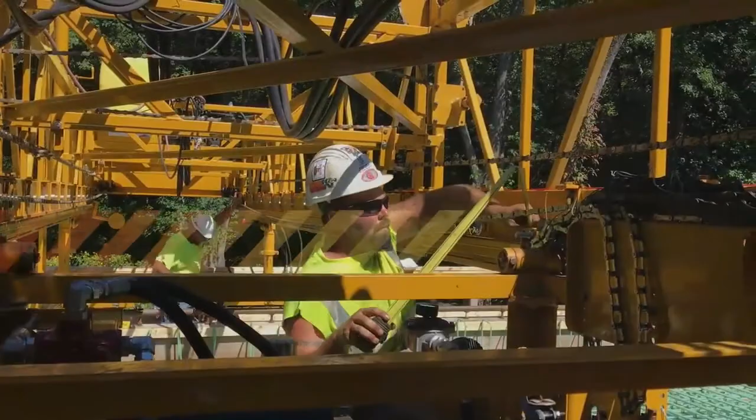The operations presented in this video are meant to be instructional to ensure quality construction. This video is not intended to provide a comprehensive overview of safety procedures. All parties should ensure that they are familiar with and follow all safety requirements, policies, and procedures that apply to

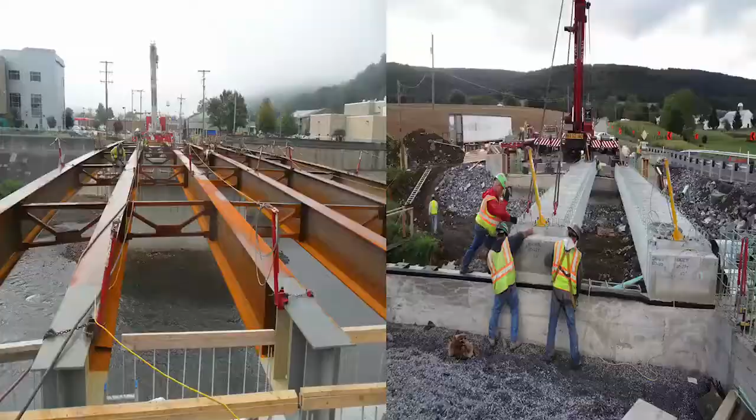their specific operation. This video discusses the important steps necessary prior to placing a concrete bridge deck. While there are many factors in the final deck construction, for the purposes of this video, we will begin after the beams have been set into place and fall protection has been installed.

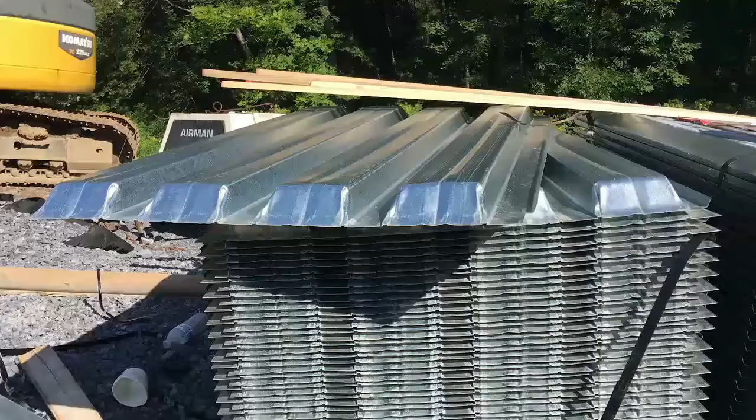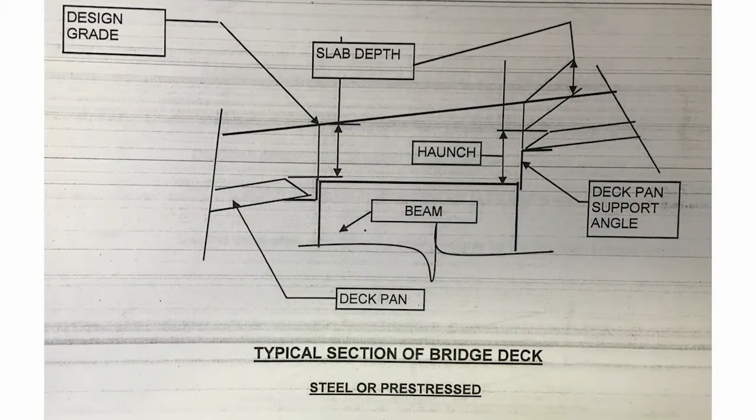Once beams have been set, the first step is to install formwork for placing the deck concrete. Deck pans are stay-in-place forms which support the concrete in the space between beams. Setting the deck pans is critical, since the pan determines the actual bottom elevation and overall thickness of the bridge deck. If improperly installed, too much or too little concrete will be deposited on the deck, which could affect load rating of the beams and overall bridge design.

Approved shop drawings for deck pans must be on the project before they are installed. Upon delivery, verify that the deck pans match the shop drawings in type, thickness, and the manufacturer. Certifications should also be reviewed for completeness and accuracy.

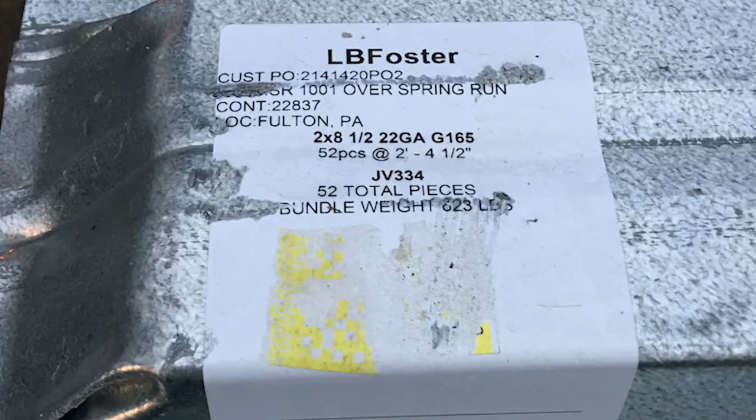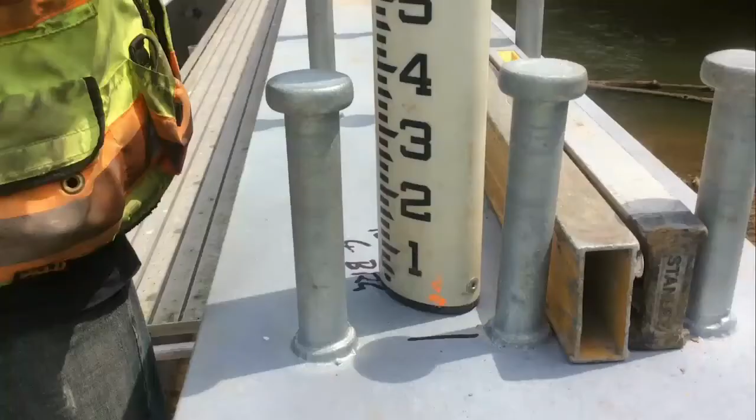Once the beams have been set, the contractor's surveyors will obtain elevations at 10-foot intervals on each beam. These elevations will be entered into a computer program which accounts for finished grade elevation, unloaded beam camber, and loaded beam camber. The output of the program gives the contractor measurements to follow when setting the support angles for the deck pans. A copy of the contractor's computer output should be obtained and reviewed by the inspection staff prior to installing the deck pan support angles.

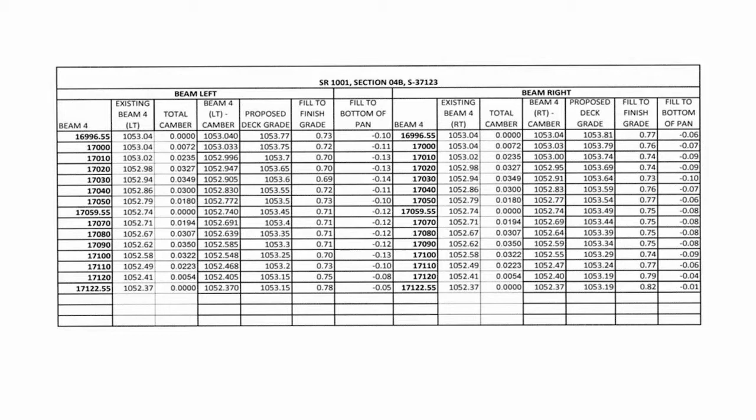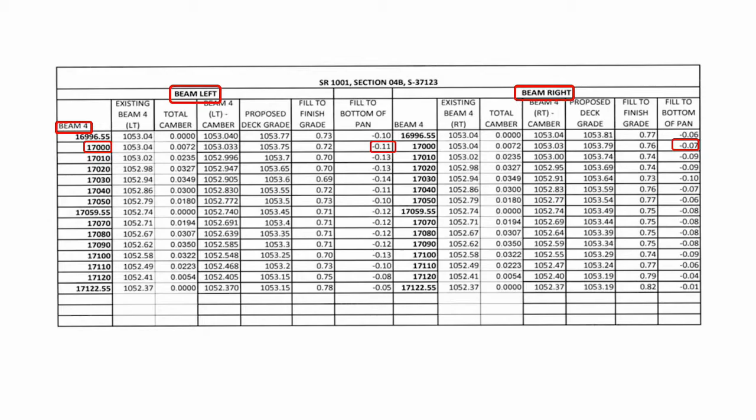For example, for beam number 4 at station 170+00, the bottom of the pan should set 0.11 feet below the left side of the beam and 0.07 feet below the right side. The contractor's surveyors will then place grades on each side of the beam for setting the angles. It is very important to communicate with the surveyors to understand what these grades represent. Some surveyors will list the fill height to finished grade, while others may show the grade to the top or even the bottom of the pan.

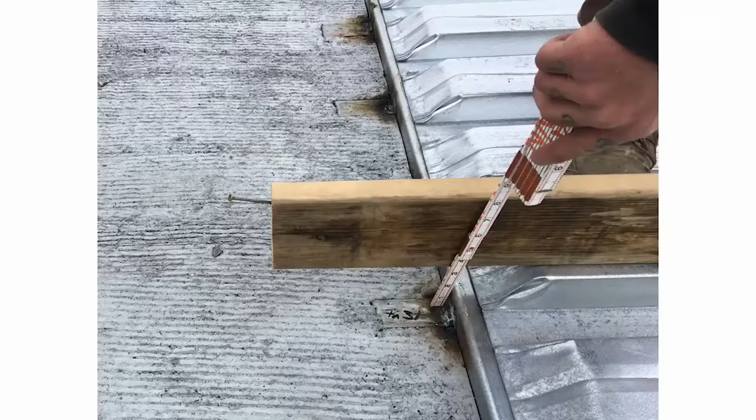Measurements are best checked by the inspection staff when the layout is being performed prior to welding the support angles in place. The welder's certifications should be checked by the inspection staff prior to any field welding being performed. Certifications can be checked at the American Welding Society's website. Copies of the certification should be maintained in the project records.

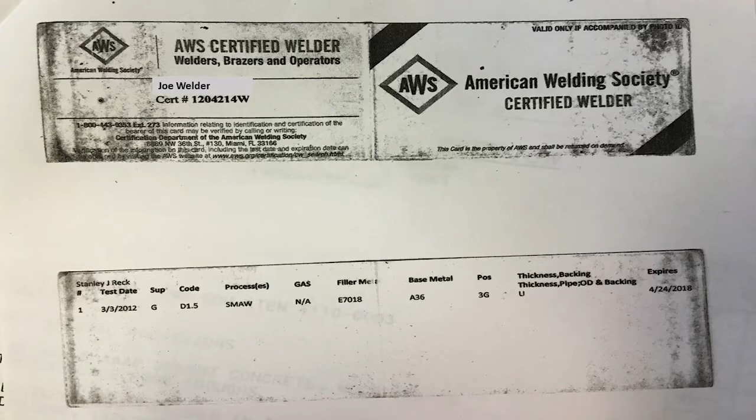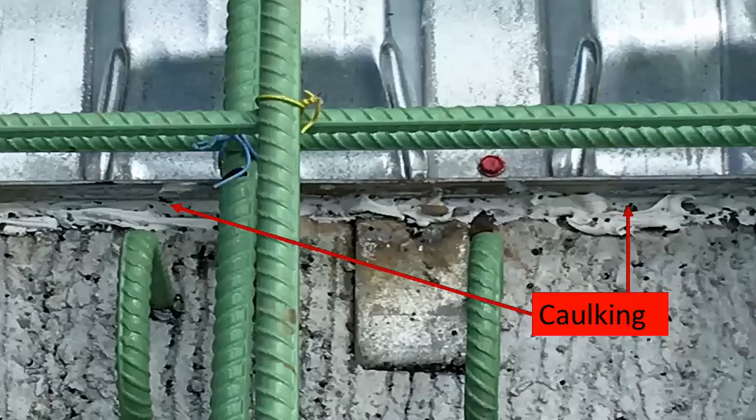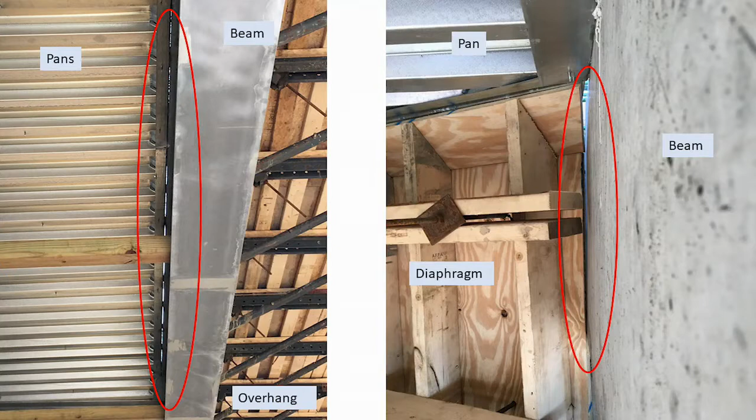The approved shop drawings should be reviewed for all installation details. Ensure the deck pans are lapped in the direction of the pour and secured in place as directed. After all the pans have been placed, all openings around the pans and formwork should be sealed to prevent leakage of grout during the deck placement. Gaps in the pans and formwork are easily identified from under the structure. Look for areas where daylight is visible.

Now that we have discussed proper deck pan placement, we will focus on falsework. The deck overhang is a temporary working area to be utilized during the deck construction operations and is installed concurrently with the deck pans. The contractor is to submit a falsework design, prepared by a professional engineer, for the deck overhang. The falsework design is to be reviewed and approved by the structure control engineer prior to installation.

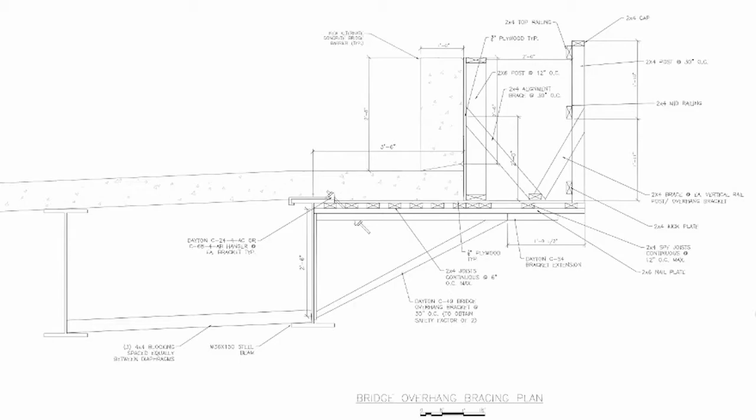The falsework is designed to carry the weight of the concrete, finishing machine, and workers. The falsework should be inspected as it is being constructed to ensure it meets the design requirements. Prior to placing any concrete on the deck surface, the falsework must be inspected and certified by a professional engineer.

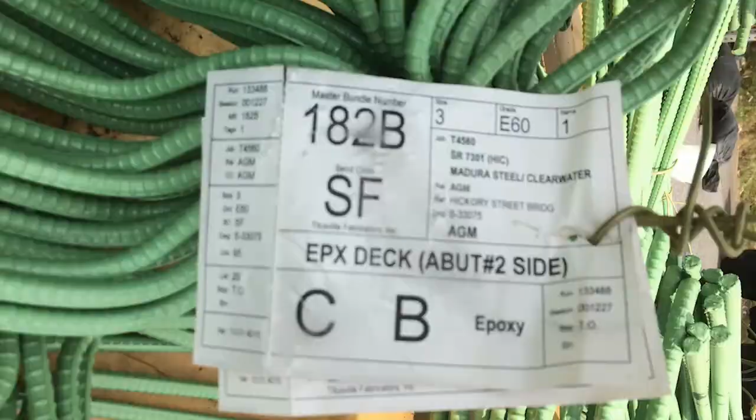After the deck pans and falsework have been completed, the placement of reinforcing steel can begin. Reinforcing steel should be inspected upon delivery for proper certifications, approved suppliers, damage, coatings, and grade of steel. Handling of epoxy-coated steel should be performed using nylon slings or other methods to prevent damage to the coatings. Reinforcement should be stored on platforms off the ground and should be free from dirt, oil, grease, injurious corrosion, or other foreign substances.

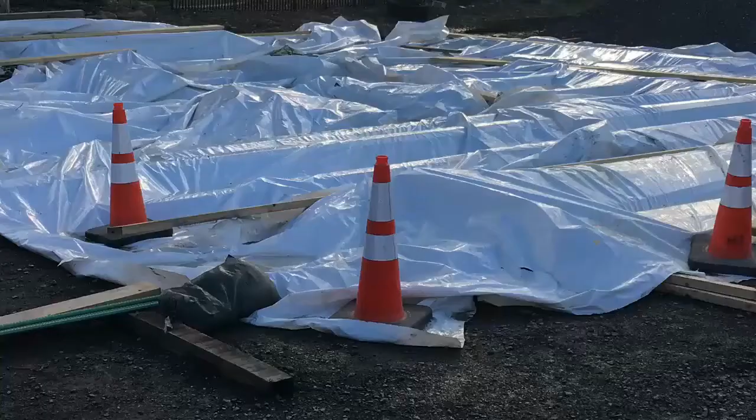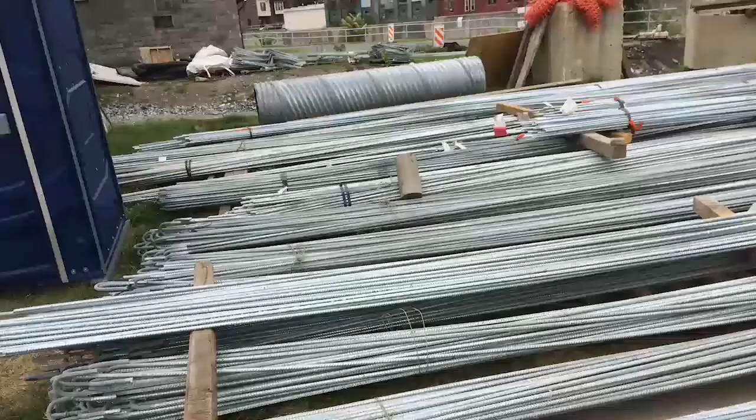Any epoxy-coated reinforcing steel that will be stored for longer than 2 months must be covered with opaque polyethylene sheeting to protect the coating from ultraviolet light. Galvanized reinforcement must be protected in the same manner if being stored for longer than 1 month.

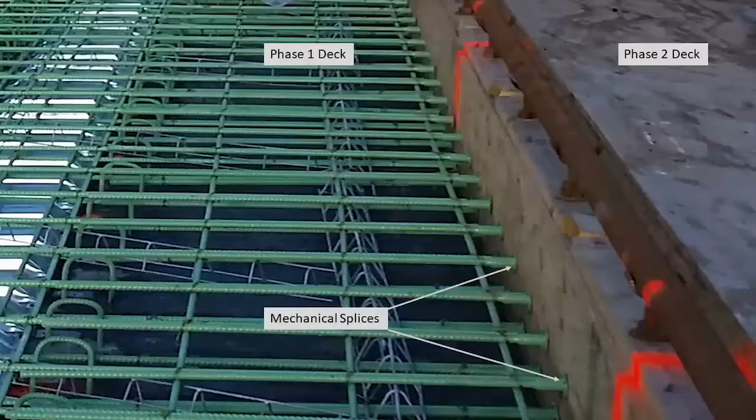Mechanical splices are used to connect pieces of reinforcing steel to allow load transfer from one piece of steel through the next member. Mechanical splices are typically used for phased construction, when only half of a member can be constructed. The second half of the splice is manually installed after the change in construction phasing.

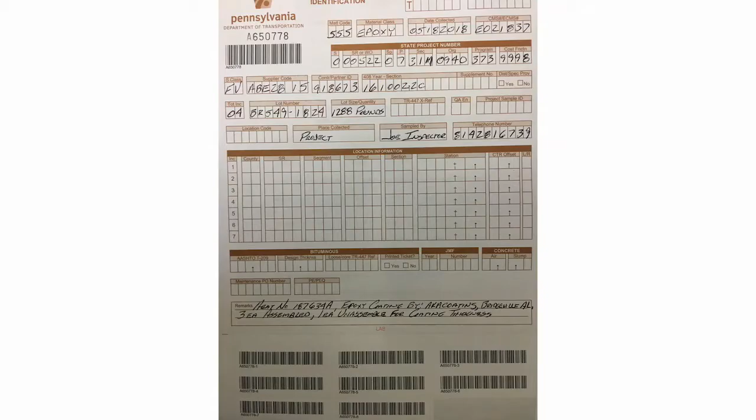Any mechanical splice systems to be used on the project must be sampled, assembled according to the manufacturer's recommendations, and tested by PennDOT's laboratory testing section prior to use. Samples of 4 increments for each size and type of mechanical splice must be submitted. 3 samples are to be assembled for testing to verify the physical properties, and 1 sample is to remain unassembled for testing of coating thickness on an epoxy-coated or galvanized coupler body.

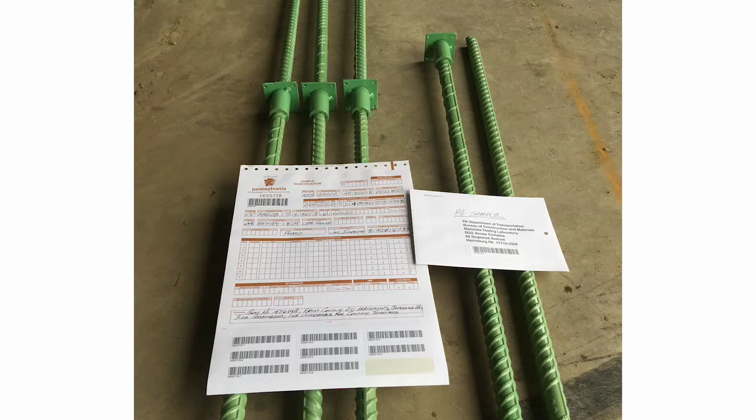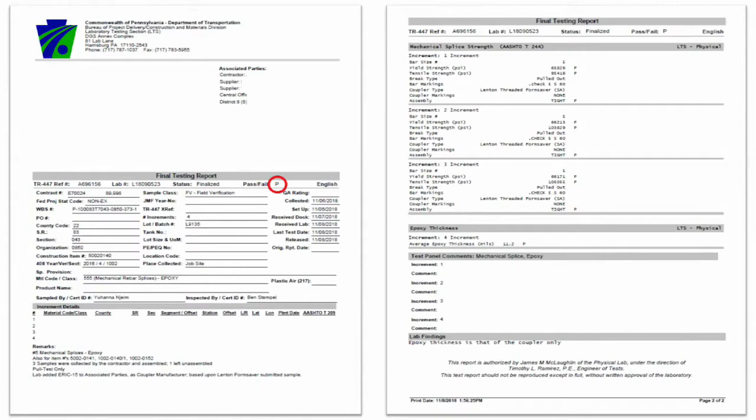A copy of the manufacturer's assembly recommendations must accompany the samples submitted. Passing test results must be obtained prior to encasing the mechanical splices in concrete. It is important to submit samples early enough to allow time for testing and potential follow-up actions that may be required. The reinforcement is best inspected as it is placed, rather than once completed, to avoid any costly rework and hard feelings between the contractor and the inspection staff.

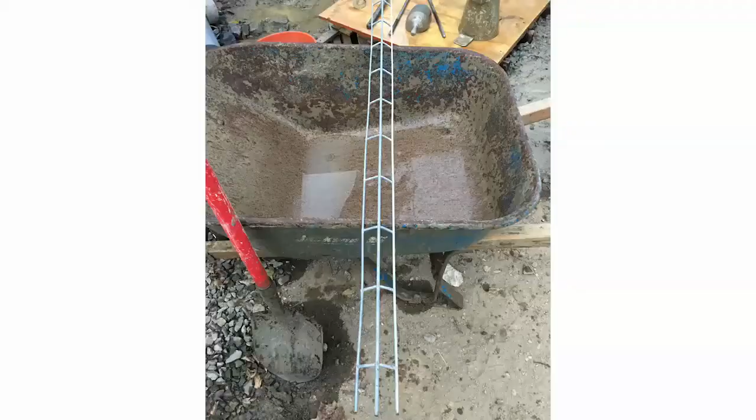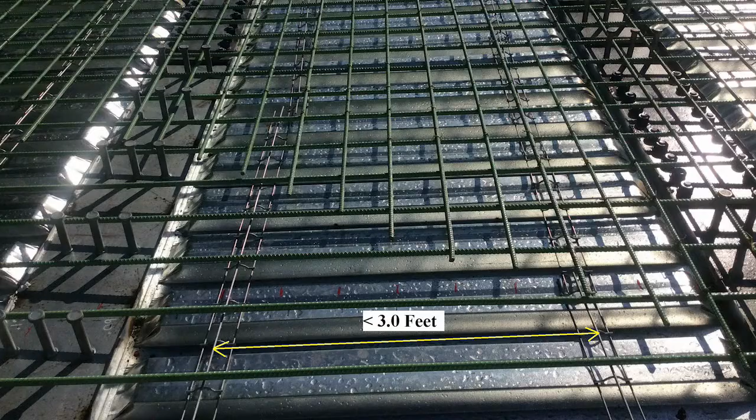For support, reinforcing bars are set on chairs. Typically 1-inch chairs are placed on the deck pans for supporting the bottom mat. The chair spacing is not to exceed 3 feet to prevent any unwanted movement of the reinforcement. All reinforcement is to be spliced and lapped as indicated, and is to conform to the spacing and clearances shown on the design drawings within plus or minus 1/4 inch.

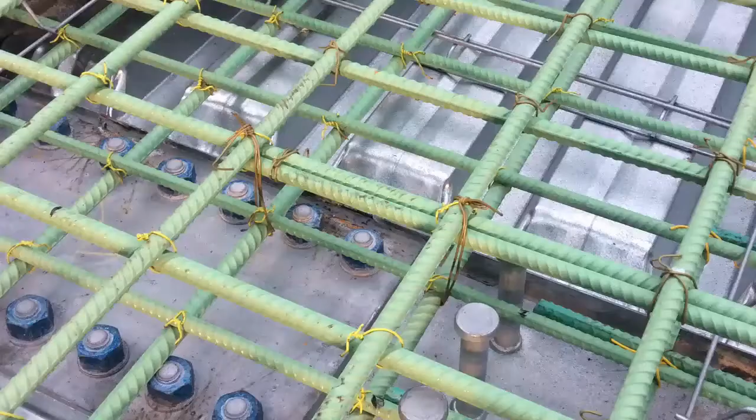All bars are to be securely fastened at each intersection on the top mat. For other intersections, when the bar spacing is greater than or equal to 12 inches, tie all intersections. When the bar spacing is less than 12 inches, either tie all intersections or tie alternate intersections in each direction to provide a staggered tie layout. Tie epoxy-coated bars with epoxy-coated iron annealed wire, and tie galvanized bars with galvanized iron annealed wire.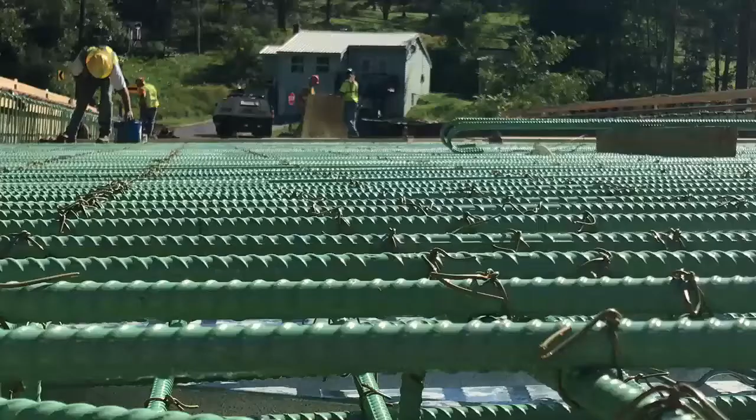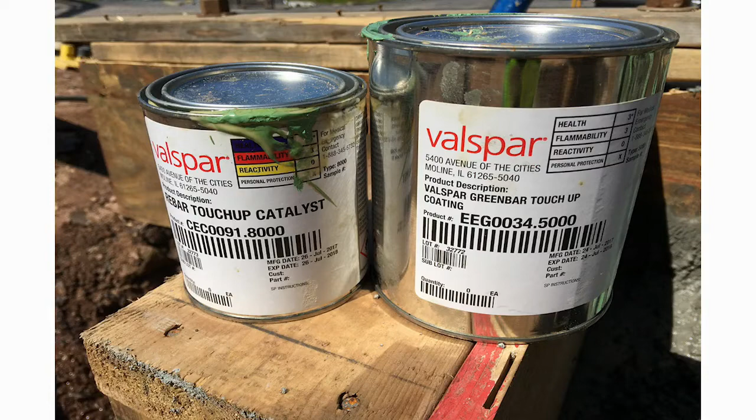After all reinforcing steel has been placed and tied, the top mat should be tied down to the superstructure at sufficient locations to prevent any uplift during the concrete placement. Visual observations can be made for any obvious high or low areas in the deck steel. A 2-part epoxy touch-up kit should be used to repair any damaged epoxy coating. A780 zinc paint should be used to touch up any damaged galvanized coatings. Epoxy-colored spray paint is not acceptable.

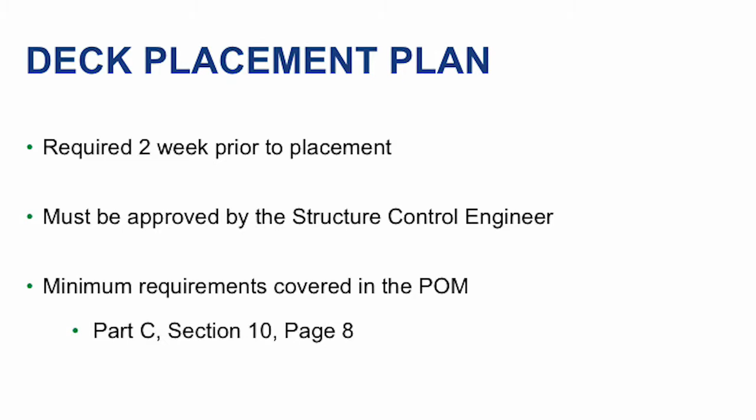It's important to plan well to achieve quality in a bridge deck. At least 2 weeks prior to the anticipated deck placement date, a deck placement plan is to be submitted to PennDOT for review and approval. The plan must be approved by the structure control engineer. The minimum requirements of the plan are covered in the Project Office Manual, Part C, Section 10, page 8. Every aspect of the placement should be covered in the plan.

A deck pre-placement meeting is also required at least 2 weeks prior to the deck placement. This meeting should include all parties involved with the placement, including inspection staff, the contractor's superintendent, foreman, technicians, district structure control engineer, quality assurance, district materials representative, and the concrete supplier's representative. All aspects of the deck placement should be reviewed in detail. Guidelines for the pre-placement meetings can be found in the Project Office Manual, Part C, Section 10, page 10.

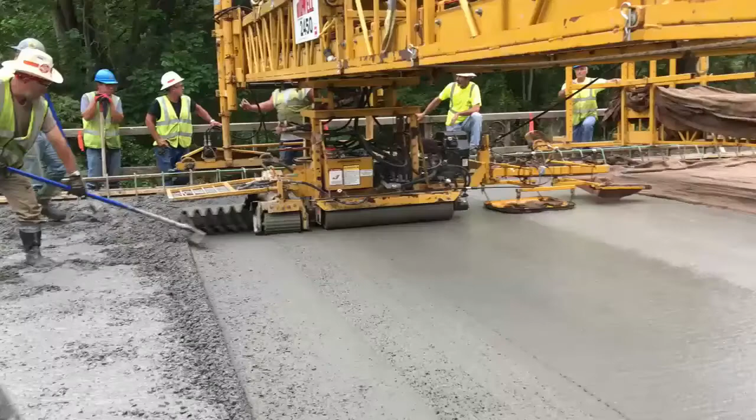Now that the deck steel has been tied and the planning has occurred, we can set up the finishing machine that will be used to place the deck. The finishing machine will run on screed pipes. Screed pipes should be supported on cups, spaced at 24 inches, that nearly follow the same camber as the beams. There should be no dips or humps other than the camber of the beam. Any irregularities in the screed pipe should be brought to the contractor's attention.

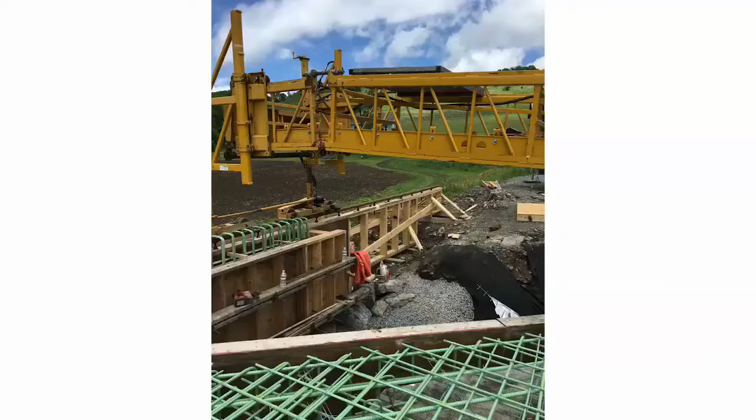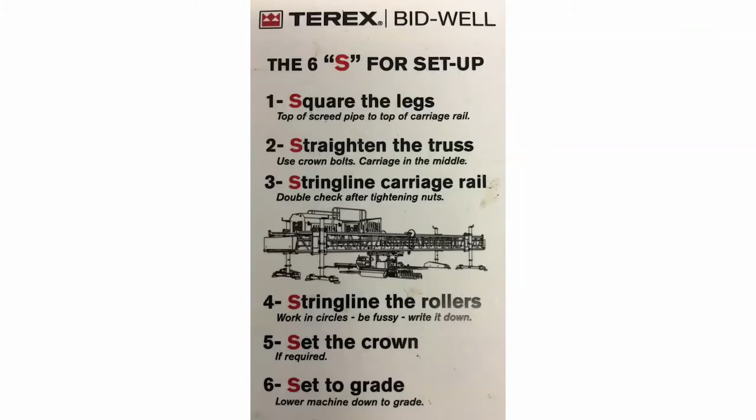It is recommended that the screed pipes extend far enough beyond the structure to accommodate the work bridges and to allow the finishing machine to finish the entire deck in the skew area of the deck. Keep in mind, the deck surface can only be as smooth as the rail the finishing machine is riding on. Terex Bid-Well recommends the 6 S's for setup of their finishing machines. The contractor is responsible for the setup of the machine, but observations and suggestions can be made by the inspection staff.

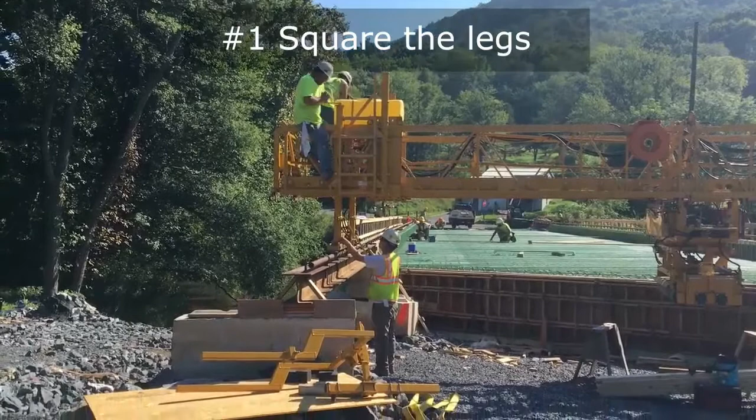1. Square the legs. The purpose of this step is to ensure the carriage rails are parallel to the proposed deck surface. Assuming the formwork on each side of the deck is the same height, all 4 legs should be adjusted to the same height when measuring from the screed pipe to the top of the carriage rail. Check with measurements to ensure all 4 legs are the same height.

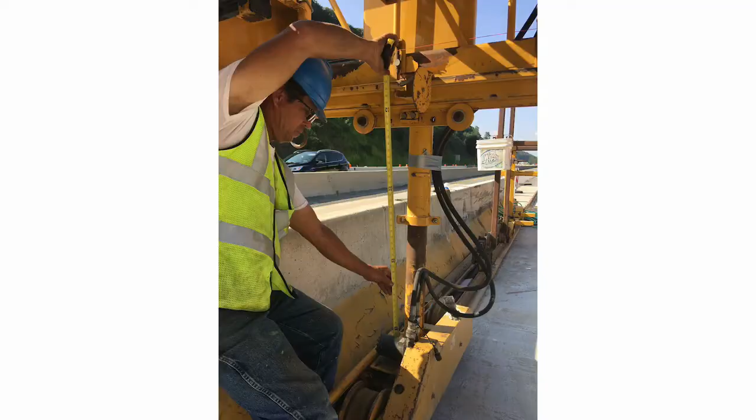One of the 4 legs should also be locked to the truss to prevent any unwanted lateral movement on the truss section. Caution should be made to ensure only one leg is locked, as this will allow the other legs to flex without walking off the screed pipe.

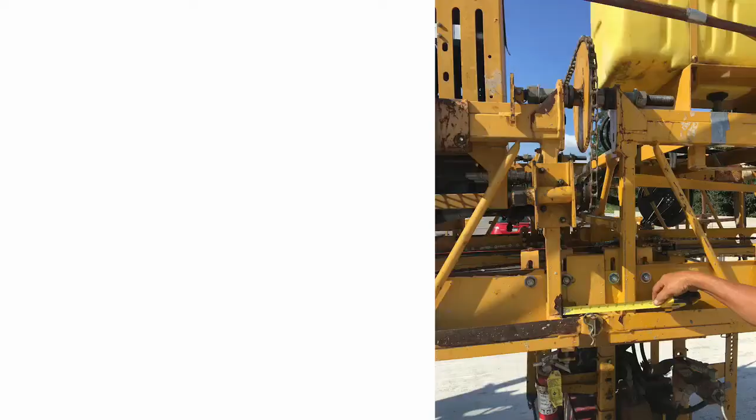2. Straighten the truss. All crown should be removed from the truss frame if using the crown bolts. The carriage should be positioned in the middle to maximize the deflection in the truss. The measurement between truss sections should be equal at the top and bottom.

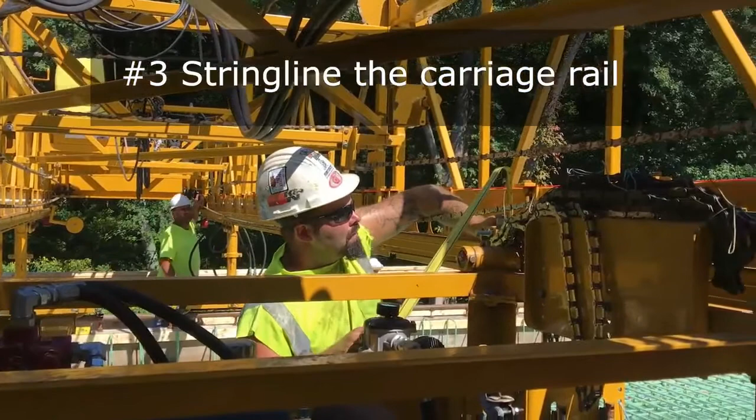3. String line the carriage rail. A string line should be stretched across the machine to ensure the carriage rail is perfectly straight. The carriage rail should be adjusted up or down as needed. Adjustments are made by rotating the carriage rail adjustment bolts either in or out to properly position the rail.

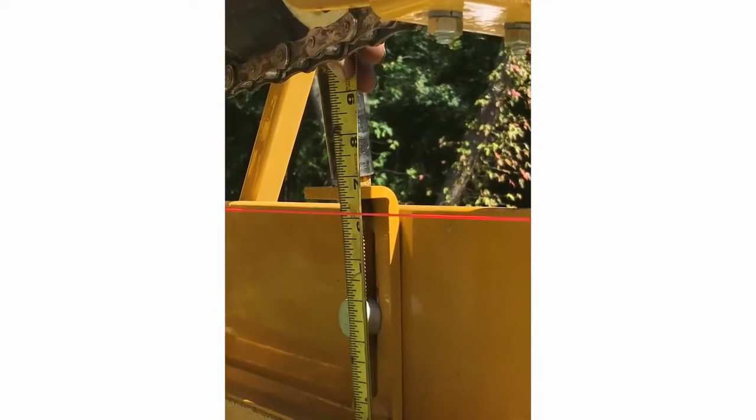Each bolt allows a maximum of 4.5 inches of travel for adjustment. The goal is to ensure that each measurement is consistent along the length of the carriage rail. Double check after tightening nuts.

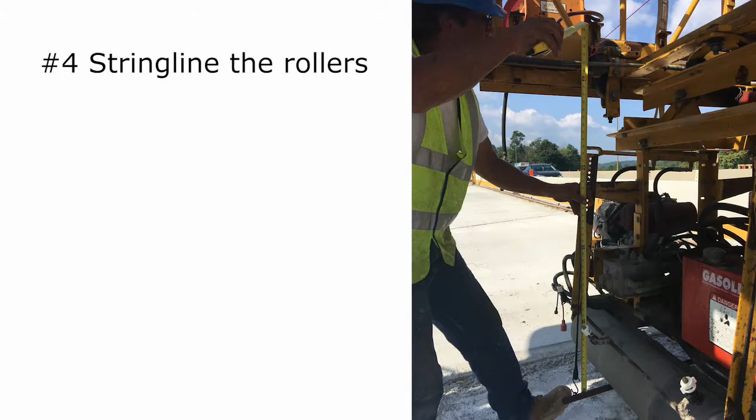4. String line the rollers. At this point, the leading and trailing ends should all be the same elevation when measuring down from the carriage rails. The rollers are adjusted by using the bolts holding the roller bearings in place. Work around the machine at least 3 times. Be fussy and write it down.

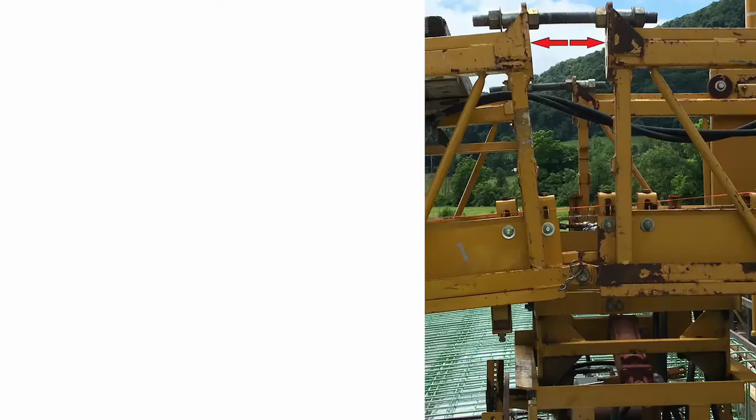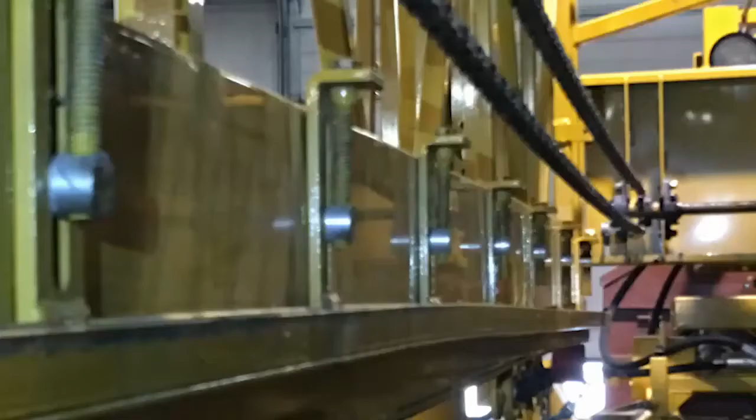5. Set the crown and shoulder breaks if required. Adjust the crown by adjusting the crown bolts until the required cross slope is achieved. Shoulder breaks can be adjusted by moving the carriage rail adjustment screws.

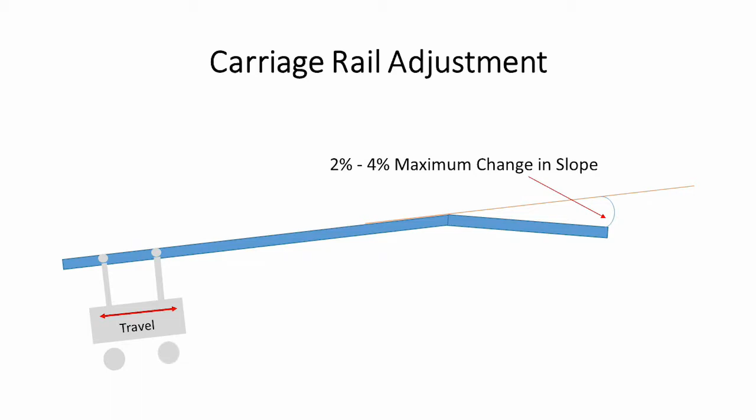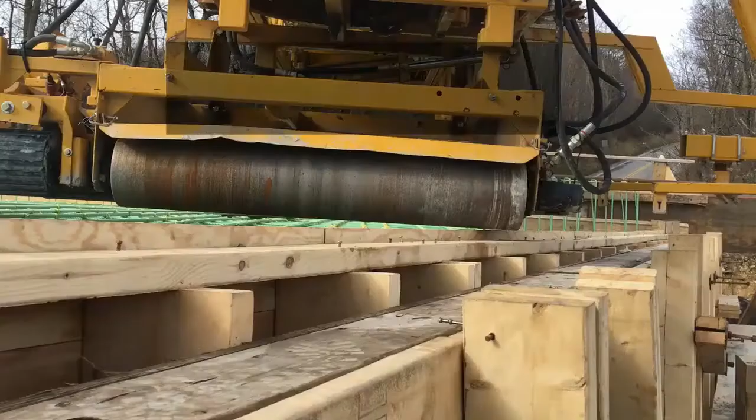6. Set to grade. Move the carriage to a place where the rollers are over top of a bulkhead or other fixed elevation. Using the leg cranks, lower the rollers so that they are just slightly above the bulkhead. Move the carriage along the bulkhead from one side to the other. When satisfied that the grade of the rollers is correct, measure and record the leg heights from the screed pipe to the carriage rail.

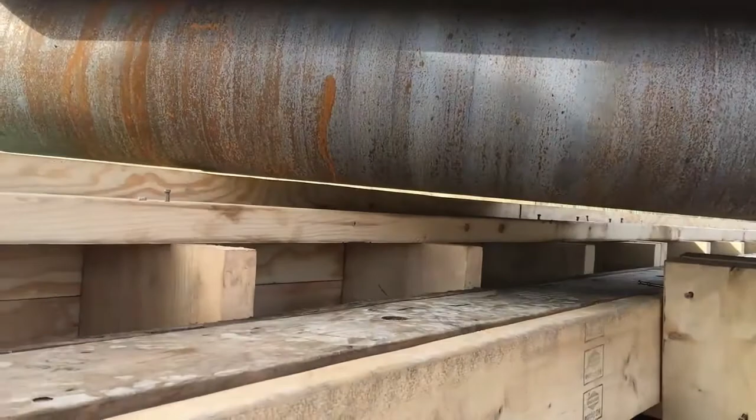Once the finishing machine has been set up and the contractor has completed all necessary rebar adjustments, you are ready for the dry run. The dry run is intended as the last-minute preparations prior to pouring the bridge deck. Everything should be considered during the dry run, not just rebar clearances and total depth of concrete.

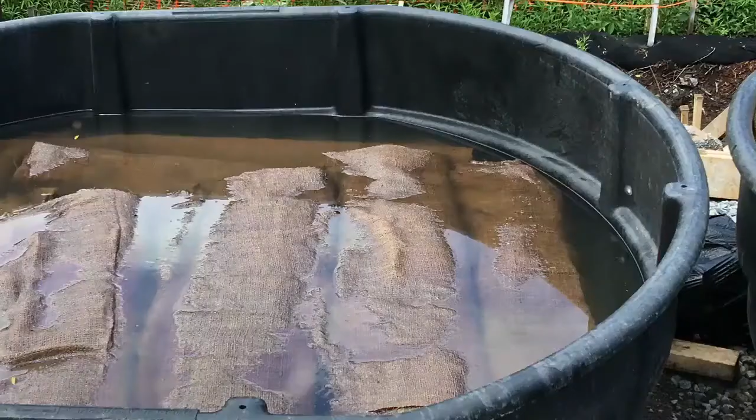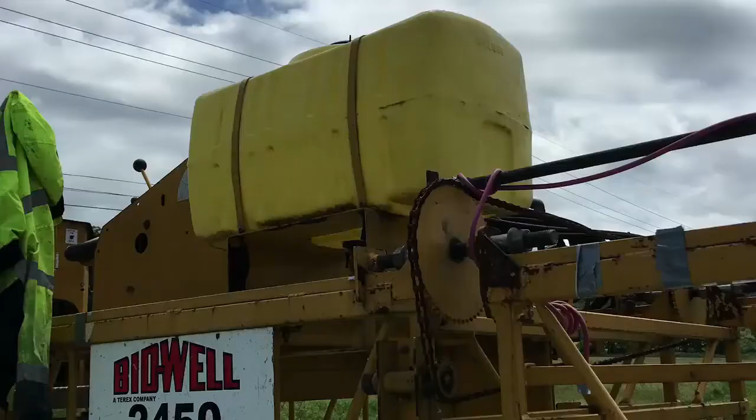For example, at this point, a sufficient quantity of burlap should already be soaking, since it's required to soak for a minimum of 48 hours prior to placement. Prior to starting, the finishing machine truss should be loaded in the same manner that it will be during the placement. Gas and water tanks should be full. Generators and lighting devices should be present, and only the operator should be on the machine. This will ensure that the deflection in the truss during the dry run matches the deflection during the placement.

Permanent station markings should be placed on the vertical edge formwork to be used as reference points during the concrete placement operation. To start the dry run, the leading edge of the rollers should be placed over a fixed, known elevation, like the bulkheads. The leading edge of the rollers should clear the bulkhead by 1/8 to 1/4 inch at all locations along the bulkhead. All bulkheads or expansion dams should be checked for clearances.

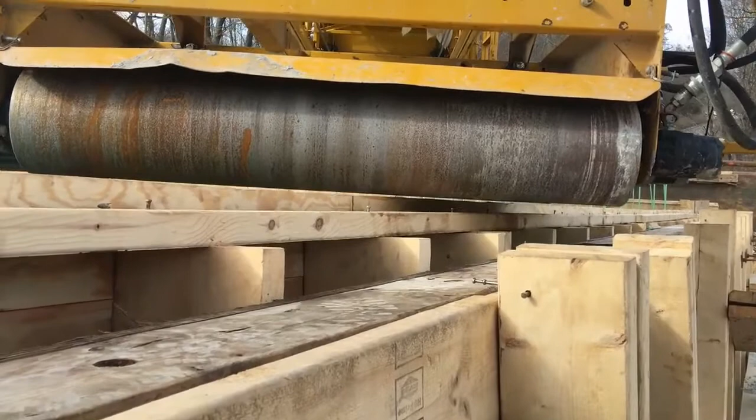If problems exist for clearances on the bulkheads, the legs should be equally raised or lowered to properly clear the bulkheads. After clearing the bulkheads, a straight edge is attached to the rollers to facilitate obtaining the dry run cover and depth measurements. The inspection measurements must be entered directly into an approved source document, similar to the one shown here, and be included in the permanent project records.

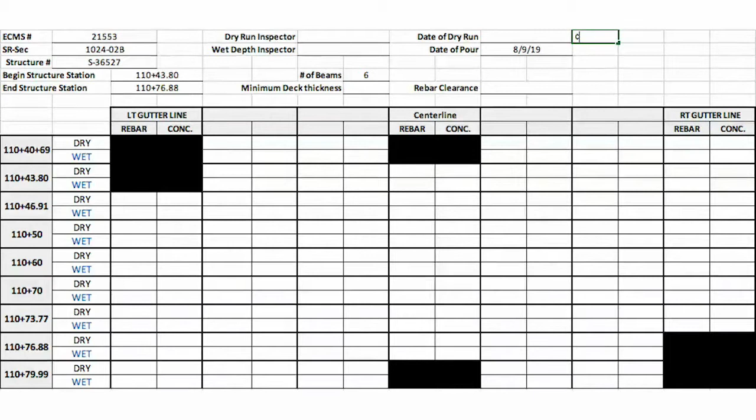Measurements will be taken over each pan, gutter line, and break point at longitudinal intervals not exceeding 10 feet along the length of the bridge deck. Record all total dry depth and cover measurements directly into the source document. Reinforcing steel deviating from the cover requirements by more than 1/4 inch must be corrected and rechecked.

During the actual concrete placement, the wet depth check should be documented and compared to the measurements obtained during the dry run. The dry run should also include a check of finishing machine operation. Operate the finishing machine in production mode to ensure the reversing mechanisms are changing the direction as intended.

The finishing machine should be timed to ensure it will finish the surface fast enough to meet the minimum specification longitudinal placement rate of 20 linear feet per hour. The unit should advance from 3 to 6 inches for each carriage pass.

The transverse carriage travel speed can be increased or decreased depending on how the surface is being finished. A slower carriage travel speed will allow the paving rollers to have longer contact with the surface. A common starting point for carriage travel speed is approximately 60 feet per minute.

The trailing end of the rollers should be approximately 1/8 inch higher than the leading end. This is accomplished by turning the rear leg cranks 1/2 turn counterclockwise. Document the leg heights again at this point as a check for any unwanted tampering of the equipment prior to releasing the concrete.

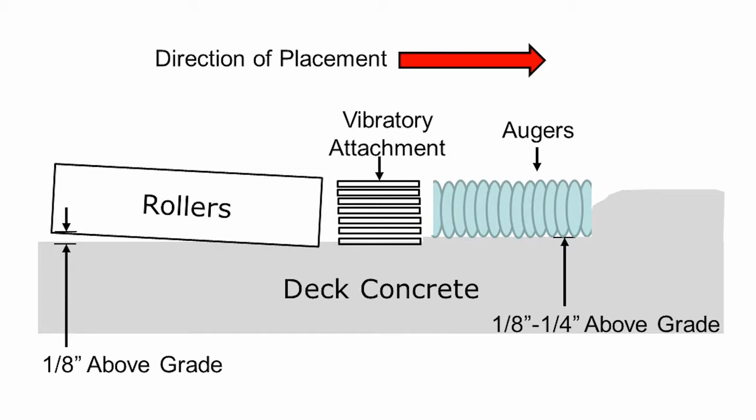While facing the machine, the clockwise auger should be in the right-hand shaft and the counterclockwise auger should be in the left-hand shaft. The augers should be initially set approximately 1/4 inch higher than the rollers. This adjustment is typically fine-tuned after the placement starts. The augers will form an imaginary V when installed correctly.

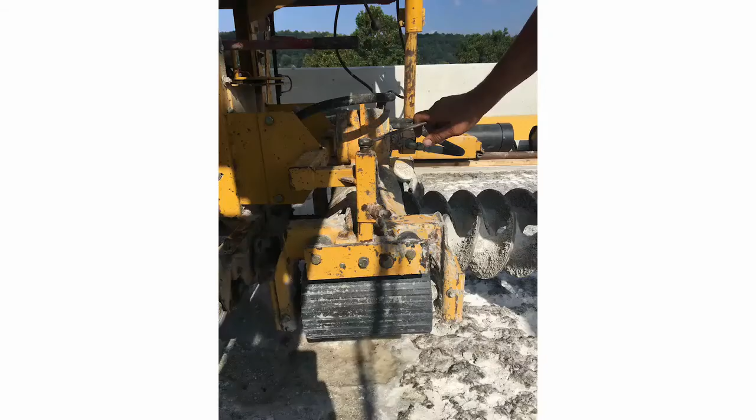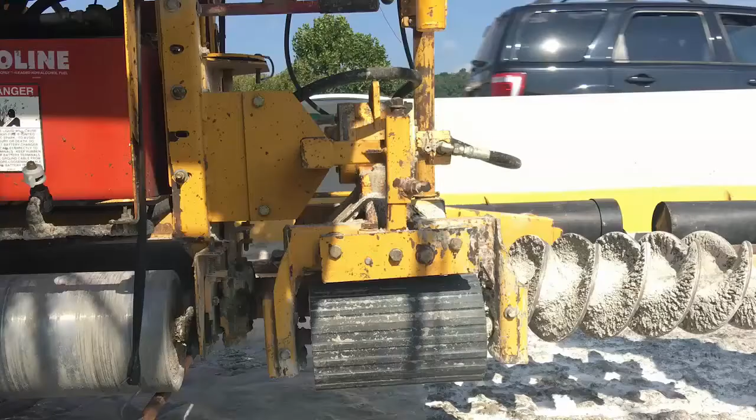The finishing machine must apply vibration to the plastic deck surface through a separate attachment from the machine manufacturer or by other means approved by the representative. Install and adjust attachments according to the manufacturer's recommendations. In advance of the deck placement, check systems to ensure proper operation.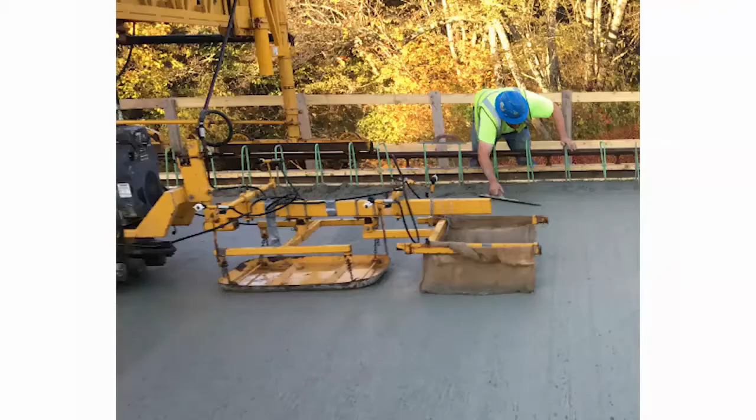The drag pan and burlap drag H-frame should be mounted 5 to 7 inches above the finished surface. If the H-frame is too high or the chains are hooked too high, the pan will tend to hop as it is being dragged across the deck.

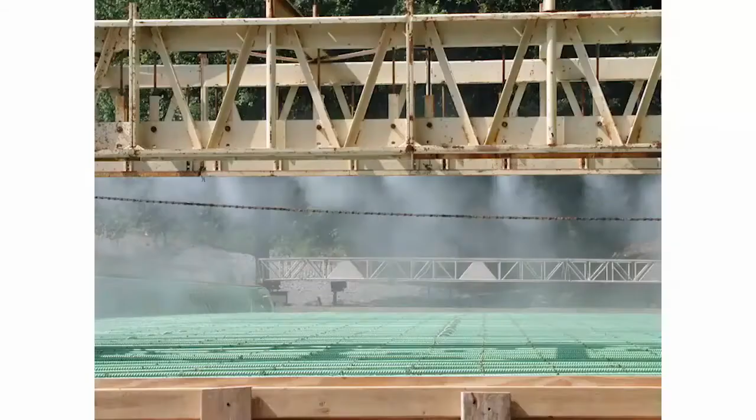The fogging equipment should be checked for proper operation. Nozzles should be pointed up, and the entire area behind the finishing equipment should be fogged. The nozzles should produce a fog and not spray or leak on the concrete. Water should never be sprayed directly onto the surface of the concrete.

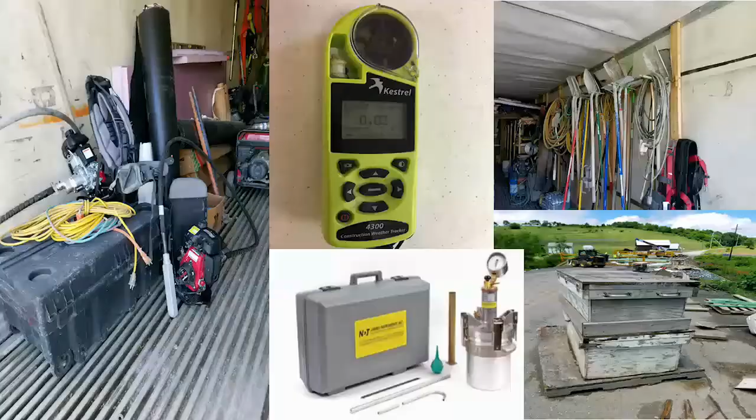Before the actual deck placement, it is important to make sure all necessary equipment and tools are available. This includes all concrete testing supplies, 10-foot long-handled straight edge, floats, rakes, shovels, vibrators, evaporation rate monitor, and tining rake if applicable. Also, any needed lighting and generators should be checked, and a concrete cleanout facility for trucks should be available.

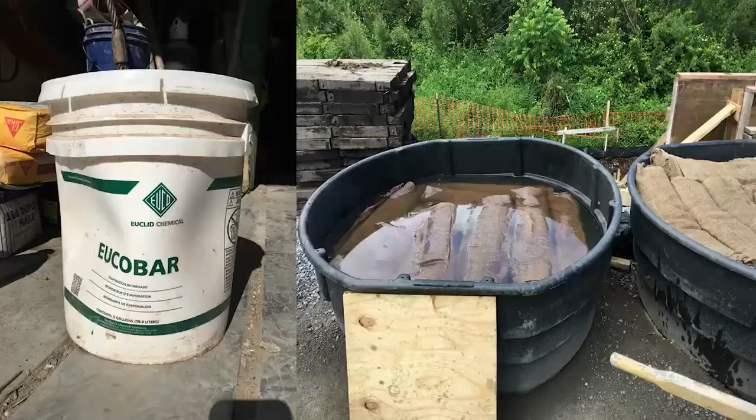Materials for curing should be on hand, such as intermediate curing compound, an adequate supply of water, pre-soaked burlap, soaker hoses, and polyethylene sheeting. Plastic should be on hand in case of any unforeseen rain.

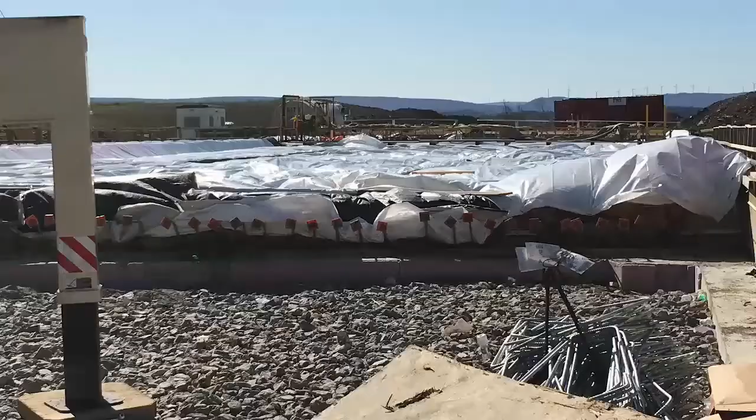When the forecasted low temperatures are to be between 35 and 50 degrees at any time during the entire curing period, cool weather curing materials must be placed in addition to the normal curing materials. Blankets and polyethylene sheeting must be on hand to be placed on the deck.

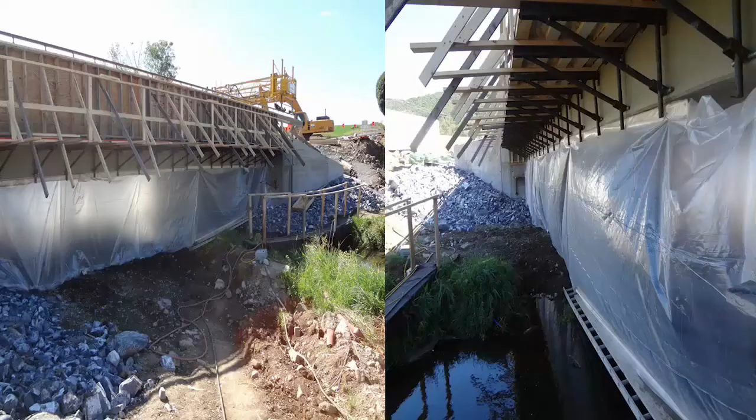When the forecasted low temperatures are to be less than 35 degrees at any time during the entire curing period, the underside of the deck must also be enclosed and preheated prior to placing concrete. Heating can be accomplished by circulating hot water through lines placed under the deck, or by placing a series of heaters inside the enclosure.

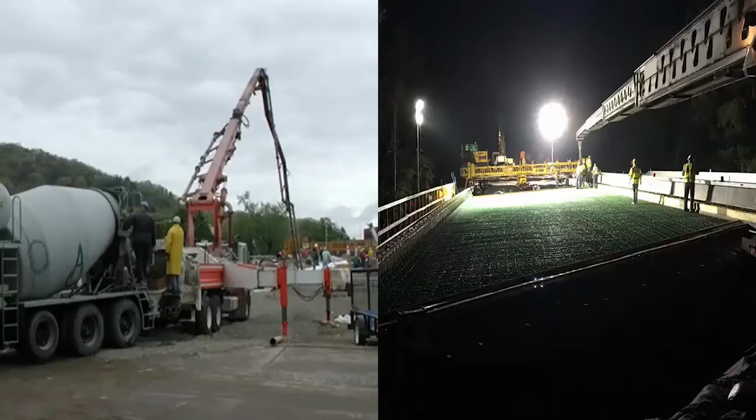Other items to consider are the concrete pump or telebelt location and reach capabilities, along with any needed traffic control accommodations for the concrete delivery trucks. Concrete should not be released until the pump or telebelt is on site. Also, there should be a backup plan with equipment on hand in case of a breakdown.

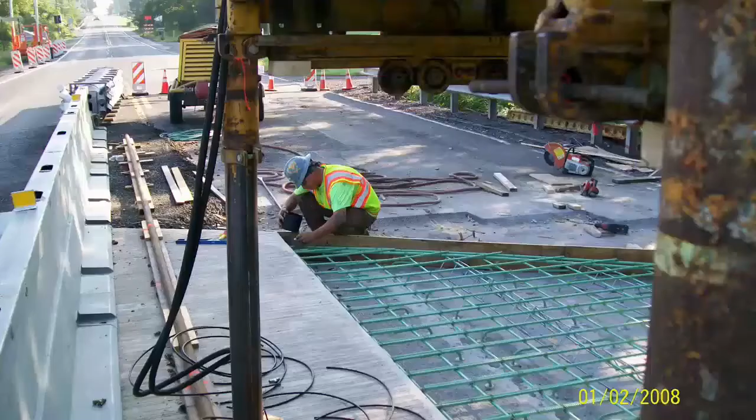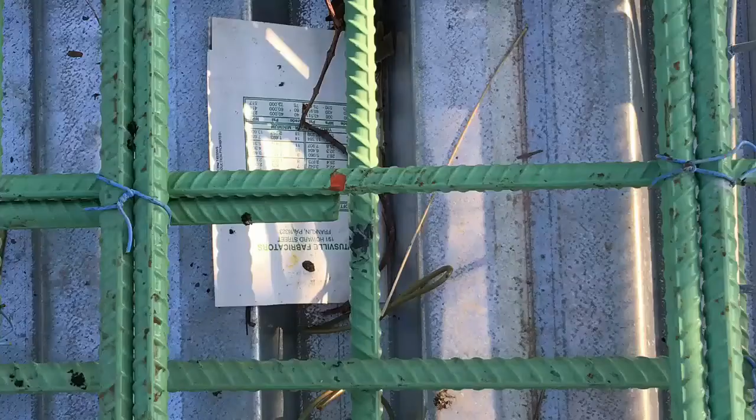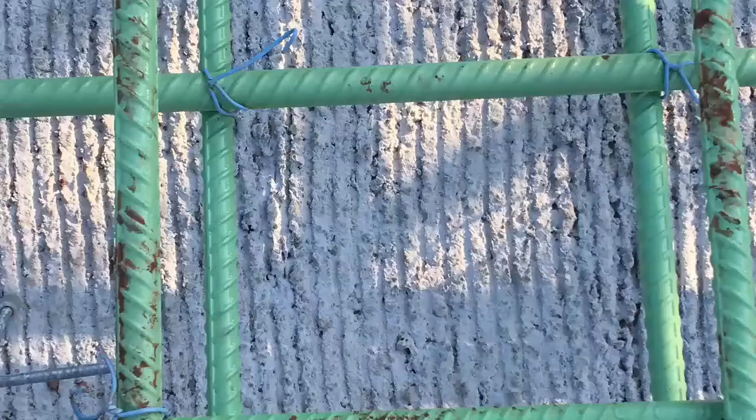Final rebar touch-up should be performed on the day prior to the deck pour. All damaged epoxy coatings should be repaired with an approved 2-part epoxy touch-up kit. A final cleaning of the deck should also be performed the day prior to the deck placement to remove all mud, dirt, sawdust, tie wires, etc. Vacuuming or pressure washing are acceptable methods for cleaning. Measures should also be taken to avoid tracking dirt and debris from the approaches onto the deck.

Getting a quality bridge deck takes considerable upfront effort. Good planning, active communication, and attention to detail will help to ensure a smooth placement and a quality bridge.